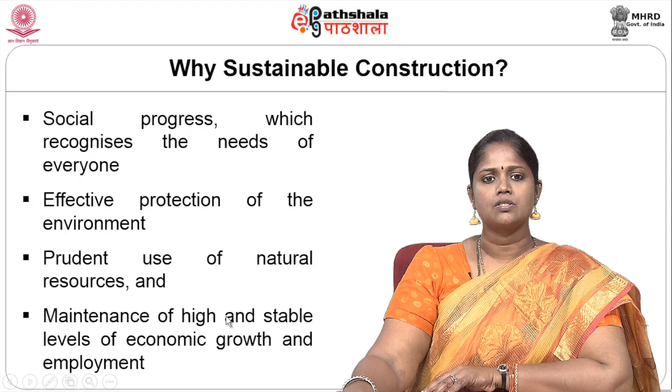In sustainable constructions, the social progress recognizes the needs of everyone. The main objective of sustainability fulfills the needs of the present and also categorizes the needs of the future, fulfilling the needs for everyone in all aspects. That is the main consideration in sustainability. It also protects the environment in a very effective manner and takes care of the natural resources available in the world, the amount of depletion of natural resources, and how to conserve these materials to a great extent. In this way, the maintenance of high and stable levels of economic growth and employment is categorized in sustainable constructions. Sustainability can be defined with many comparisons and statements.

Now let us look at traditional criteria. In traditional criteria, that is nothing but the vernacular materials and construction techniques. In this we can look at cob, wattle and daub, compressed earth blocks - all the vernacular traditional methods implemented in rural areas by rural people will come under traditional criteria.

These materials play a great role for sustainability and also increase the performance. Here, performance is nothing but the thermal performance of the material. All the vernacular materials contribute a greater level of thermal performance by reducing the climatic temperature. That means outside it may be 30 degrees Celsius and inside it will maintain 25 degrees Celsius. A temperature difference of delta T will be 5 degrees Celsius.

In this way, all the traditional materials provide a major role in maintaining thermal comfort in a building and also quality. The cost is also very less since it is available in the same place itself, and it is sustainable as we are reducing resource depletion and protecting the environment. In this way a healthy environment can be provided - we are not using any chemical elements or artificial material treatments, we are using natural materials in a traditional way. So the indoor air quality also increases to a greater extent.

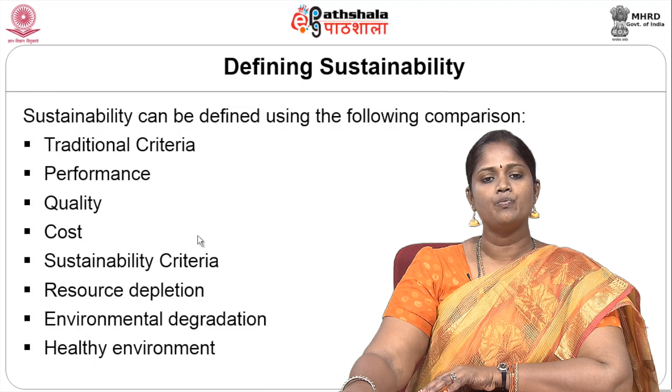And if we reduce our energy use, global warming will also be reduced to a greater extent. This is providing a role toward environmental considerations and resource, waste and recycling. The 3 R's we have seen in sustainability are reduce, reuse and recycle. This is the mantra for providing a sustainable environment and protecting the world from pollution and hazardous substances, as well as protecting the internal environment. We need proper sustainable planning - how to preserve our land, how to conserve our resources, and whatever reclaimed land we have, we need to use it properly.

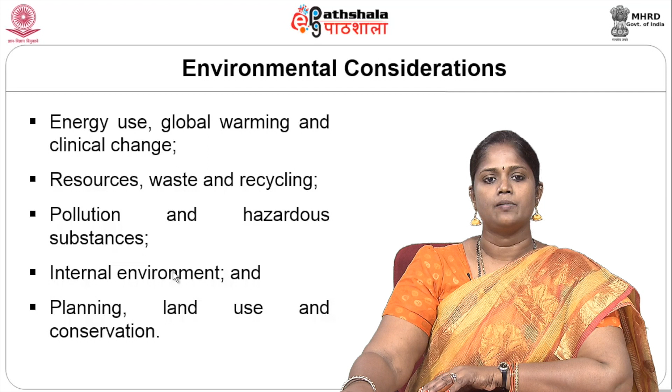Now let us look at life cycle assessment under sustainability. This is very important to know about the every death and birth of the material. It is defined in ISO 14040. It is a technique assessing the environmental aspects and potential impacts associated with the product - compiling an inventory of relevant inputs and outputs of a product system, and evaluating the potential environmental impacts associated with those inputs and outputs.

On the whole, life cycle assessment is - for any material used in the building industry - a set of LCA values that give us a hidden factor of whether this material is rich in sustainability or not, whether it is expensive, accessible, or necessary to use in the building. Interpreting these results in a fruitful analysis, and these impact assessments give us a greater contribution toward a sustainable built environment.

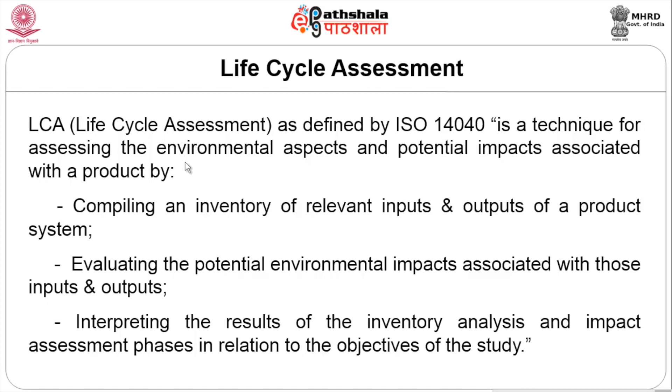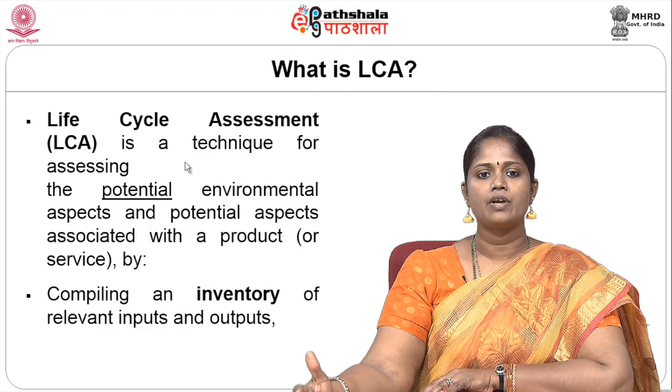Now let us look at the definitions of what they say about LCA. LCA is a technique to assess the potential environmental aspects - that is, to lead to the pathway of sustainability or global sustainability - and potential aspects associated with the product, which is compiling an inventory of relevant inputs and outputs of these materials, and also evaluating the potential environmental impacts.

If we use these materials, what are the harmful environmental impacts we are going to get? Is there any reduction in the IAQ value? Is there any kind of radiation over this material, or any kind of heat energy trapped inside or outside the surface, or inside the surfaces of the roof or wall or any other part of the building? All this interpretation of results impacts various phases in the study, and provides objectives for what needs to be done.

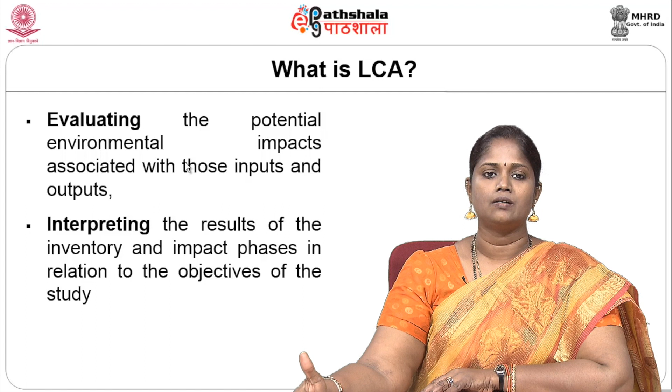Now let us look at the life cycle assessment framework chart.

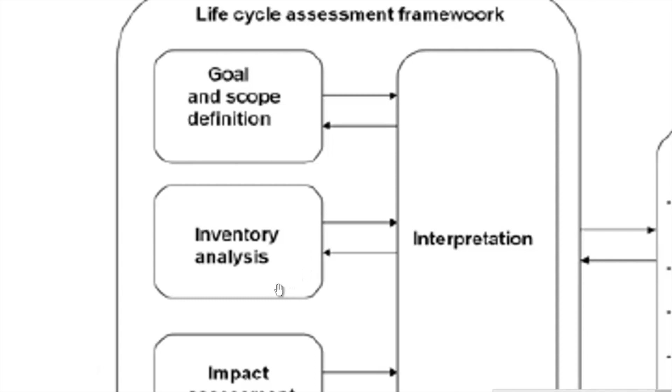The first chart describes the goal and scope definition. The goal and scope definition is to provide an entire clean, global, sustainable built environment. Then comes inventory analysis of whatever materials we are going to use in the built environment, and impact assessment of these materials towards the environment. With these interpretations we implement direct applications in product development and improvement of the built environment.

Strategic planning provides the way, from the initial form development of an architectural design to the end planning of it, and public policy making, including users' behavior policies or various aspects in the built environment, and marketing and other criteria in the life cycle assessment.

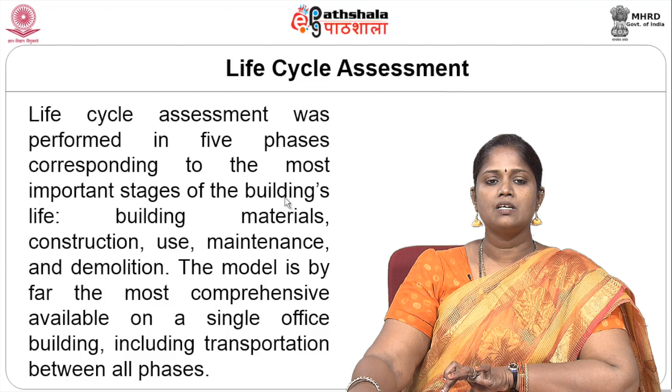Since fuel also comes under material value, we need to look at the LCA value of this material too, in terms of built environment. These phases were analyzed based upon 5 chemical equivalents. We have seen in the last slide the 5 basic phases: materials, construction, uses, maintenance and demolition.

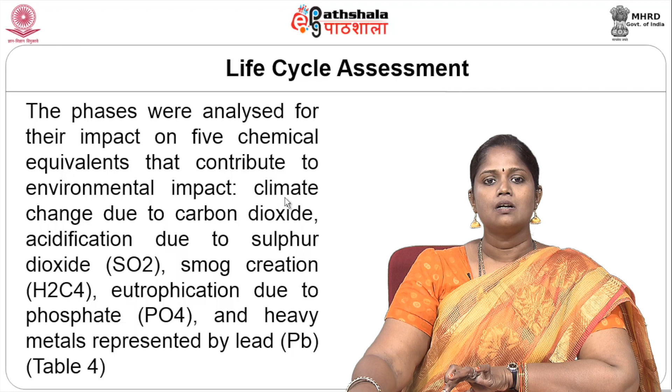Now, 5 chemical equivalents: climatic change due to carbon dioxide, acidification due to sulfur dioxide, smog creation and eutrophication due to phosphate, and heavy metals represented by lead. These chemical equivalents contribute a value in the life cycle assessment.

Now look at the life cycle assessment of the building materials in terms of tons of carbon dioxide. It produced 4,800 tons of carbon dioxide, which will impact the depletion of the ozone layer, and sulfur dioxide at 19,000, and various lead aspects at 7.4, which is very toxic and injurious to health.

During construction, it released 820 tons of carbon dioxide, which is a greater value, and sulfur dioxide at 5,800, which is again another higher value in terms of pollution.

Electrical services, which is again a higher value, contribute carbon dioxide emissions of 25,000, similarly 59,000 in sulfur dioxide. Maintenance is coming under a very lesser value, but during demolition it is 440 tons of carbon dioxide and 4,400 in sulfur dioxide.

Overall, if we construct any building or demolish it, the amount of carbon dioxide depletion comes under a value of about 48,000, which is huge. These impacts are considered over a 50 years of service life. Environmental impacts of office buildings with 50 years of service life: we are seeing carbon dioxide, sulfur dioxide, hydrogen carbonate, phosphate and lead.

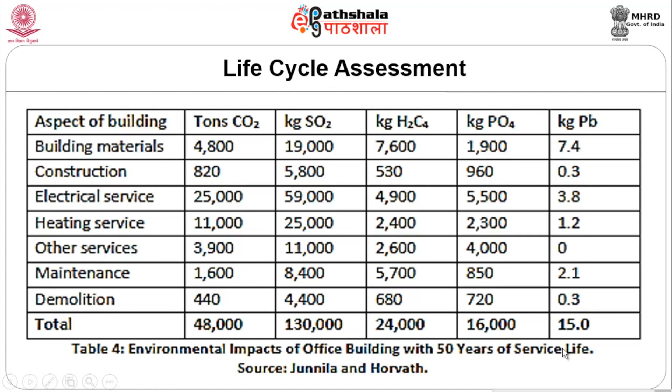So, to protect a healthy environment, what needs to be done? How do we protect ecology or minimize ecological impact? First is minimal waste, to reduce waste and also reduce pollution, and maximum amount of recycling, if we do, we can reduce pollution, and protection and enhancement of the natural environment, wildlife and biodiversity to protect local ecological resources and the environment.

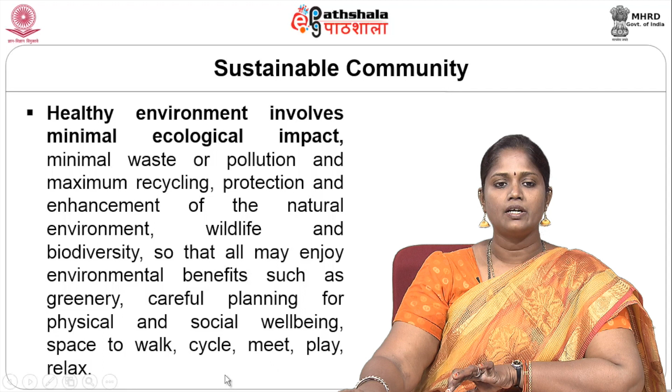Everybody enjoys the benefits of the environment, which is greenery, and we require careful planning for physical and social well-being, like spaces to walk, encourage pedestrianization and reduce vehicular movement. In this way, we reduce toxic gases like carbon dioxide, sulfur dioxide and hydrogen sulfide emissions into the environment, and have social gathering places like playgrounds and environmentally friendly spaces for relaxation. In this way, we can lead to a prosperous community.

Healthy living will lead to a healthy community. So healthy, prosperous economy will also be generated in terms of wealth and long term investment, without destroying the natural and social capitals. So we need not import materials needed for construction from various countries; we can use our own resources, reuse and conserve them, and reduce waste. In this way we protect our economy and minimize resources, achieving good environmental impact, which develops new skills through education and training, and meets basic needs through local jobs and services.

A healthy living will lead to a sustainable community, and also a social well-being arises from a people, which gives the sense of security, the belonging of our own region, our own materials, our own area, our own environment, eco-sensitivity.

These kinds of familiarity will support neighborliness, cohesion and integration of different social groups based on respect for different cultures, traditions and backgrounds. It protects our vernacular culture and also the value of our traditional heritage.

And it requires proper planning. A planning again imports a design. The design needs to take care, initially from the formation to the end product.

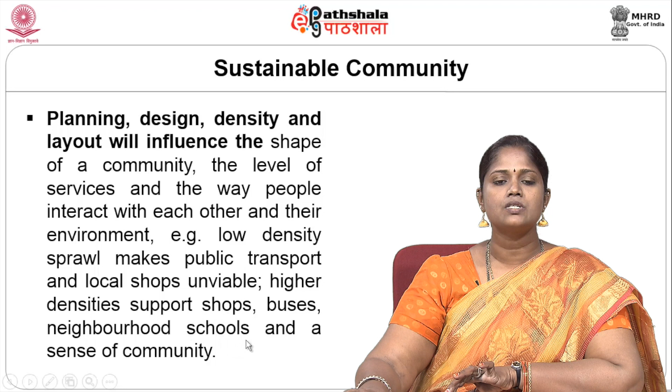Minimizing energy use and environmental impact contributes to sustainability, as we have seen, and also helps in reducing global warming and encouraging the long term stewardship of communities.

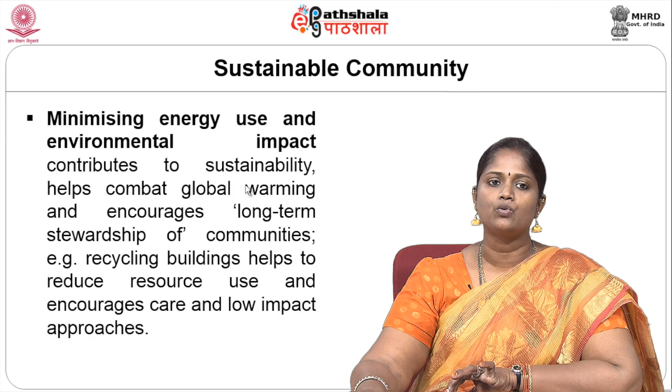Recycling buildings helps to reduce the resources used and encourages care and low impact approaches. We have seen minimizing the energy usage of the materials.

Now look at the viable local economy and services which is provided in the country, which is underpinning for community development and survival. For example, if you look at it, the loss of manufacturing has made many traditional urban communities unviable.

There are no traces of these communities existing in the place; also we can find it in many places. This requires a major economic shift and new uses for existing infrastructures so that they can flourish again.

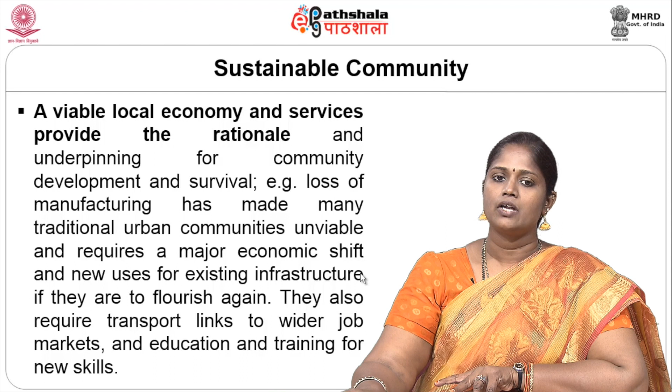They also require some kind of transport which links and connects the wider job markets, which again needs education and training in new skills for the younger generations.

So in this way we can look at it. We need to look at community organization and neighborhood management, which plays a vital role in creating social networks and urban viability, ensured in well maintained and secured conditions for stable and long term participation.

Public participation plays a major role in a sustainable community and also the cohesiveness of the community. If you look at an example like regeneration, the regeneration of old companies and providing job opportunities and local housing.

And neighborhood management organizations, so as to improve the level of social life of the people, and it again transforms the basic infrastructures to improve street conditions, community safety and security and social contact.

And youth engagement, by providing learning services, workshops and training for the youth, by acting as a local conduit for decision making and coordinating supervision and frontline service delivery, which plays a major role in the organization and the neighborhood management in the sustainable community.

What makes a sustainable community? So we have seen various factors. Now, some of the key factors we look at in sustainable communities: a flourishing local economy which provides job and wealth to the people.

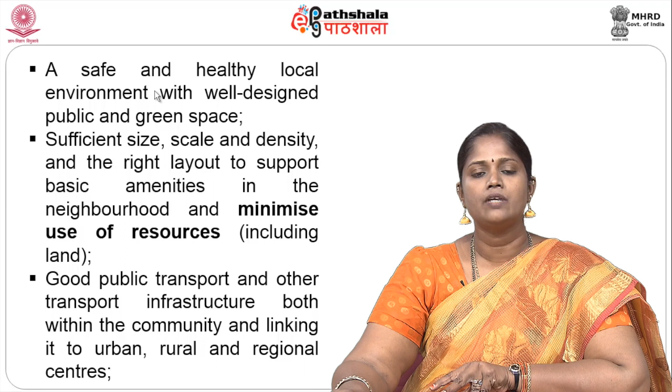Buildings have to interact both individually and collectively with the people, which can meet their needs over time, and also by minimizing the use of resources we can construct the building.

A well integrated mix of decent homes of different types of tenures to support a range of household sizes, ages and income groups like LIG, MIG, HIG. So we need to have a design orientation for different tenures and income groups of people.

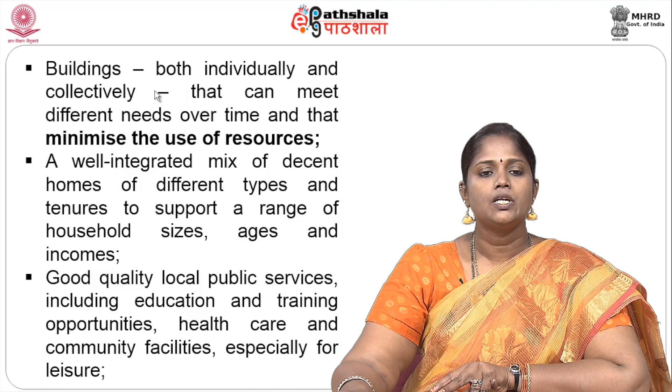A good quality of local public services including education and training opportunities, health care for the people, and community facilities especially for leisure, to encourage social communities and engage old age people and youngsters and kids, providing playgrounds and social interaction places like parks and other areas.

In this way we can provide a diverse, vibrant and creative local culture which gives pride in the community and cohesion with it. It is something like a sense of place, a sense of belonging, which we provide to the people so that they feel they belong to this place, need to protect this place, and need to use the resources in a proper way.

The right links with the wider regional, national and international communities. There are various measures of sustainable communities we have identified.

Among them, 4 main measures of sustainable communities are important: to support planning for sustainable densities, design and layout, which is an architect's job; to minimize the energy usage of the building for good environmental impact; to foster economic prosperity; and to support community organization and create neighborhood management. These are the 4 main measures of sustainable communities identified by the government in sustainable community planning.

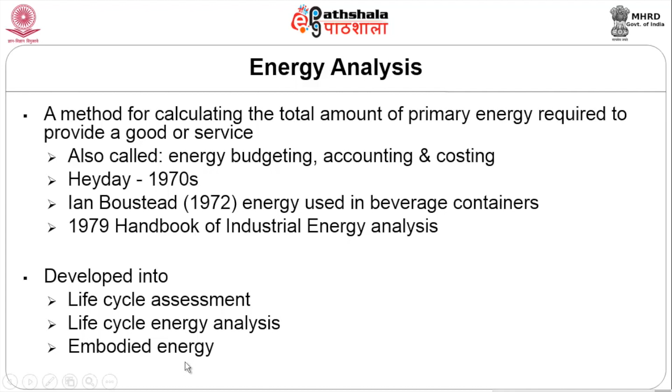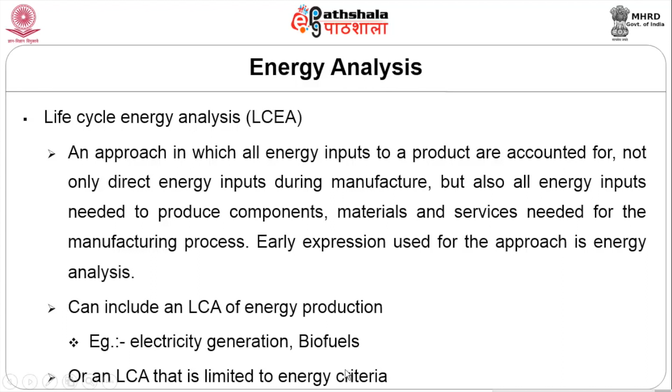Life cycle energy analysis is an approach to integrate all energy inputs into a product, accounting not only for direct energy but also the indirect energy associated with producing the components, materials and services needed for the manufacturing process. An LCA can include electric generation and biofuels, or an LCA can be limited to an energy criteria alone.

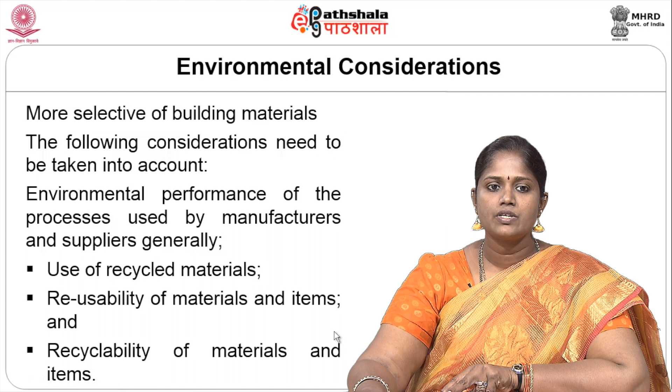For building materials, the following considerations are taken into account: mainly the environmental performance of the process used by the manufacturer in industries and the suppliers when they supply materials to the site. The first considerations are use of recycled materials, reusability of these materials, and recyclability of materials and items.

So waste minimization through reuse and recycling involves various steps. The first is prevention of usage of material not associated with environmental consideration, then reducing the usage of this material, that is minimizing it, then reusing the materials used in construction, recycling these materials, treatment of these materials, and the last stage is disposal.

So if you look at it, the more favorable options are minimization, prevention and reuse, which play a major role in terms of environmental considerations, whereas treatment, disposal, and recycling lead into some amount of energy impact into the LCA.

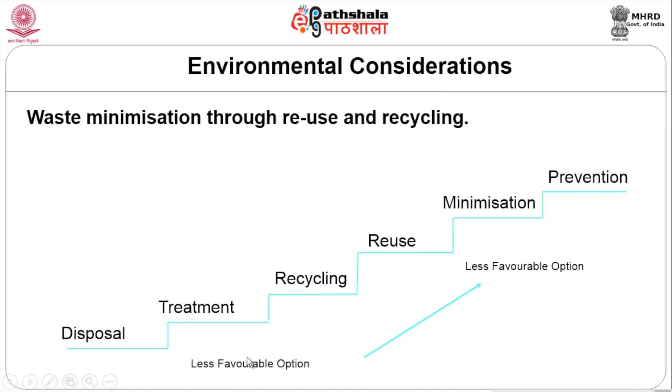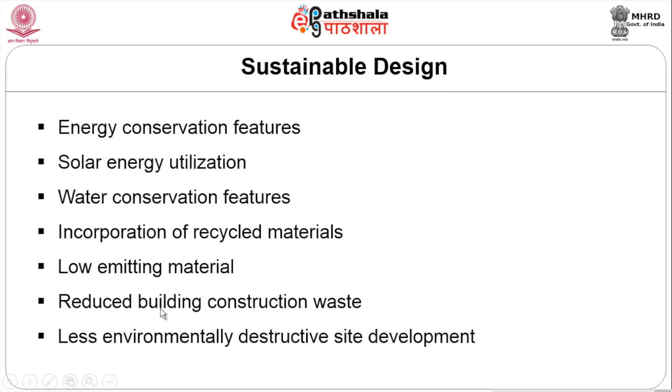So energy conservation features include solar energy utilization, which is again a renewable energy, and also water conservation features like rainwater harvesting systems, and incorporation of recycled materials—the debris of waste materials used in demolitions can be used as recycling material, like filling for the plinth, filling the stands, and also low emitting materials, reducing building construction waste, and less environmentally destructive site development.

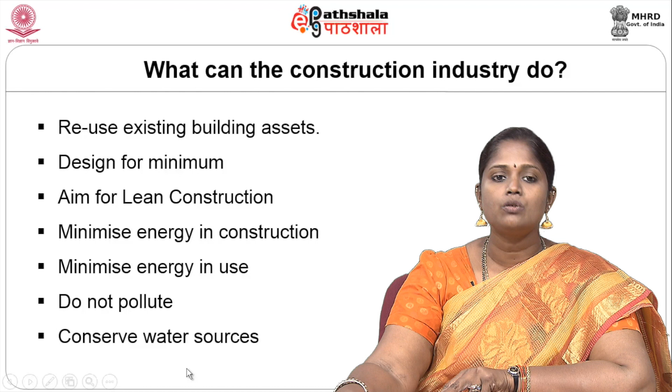So what can the construction industry do for reducing this LCA? It is reusing existing building assets, designing for minimum rather than lavishness, and aiming for lean construction, which is a vertical way of construction. Also minimize energy in terms of construction, minimize land use, minimize energy in use, and not pollute the environment, in order to conserve natural resources and water resources.

Operational carbon dioxide - we have known about these factors, the depletion of these gaseous substances which plays a major role in the depletion of the ozone layer. So how to reduce this carbon dioxide and energy consumption in new building constructions, and also the operation cost.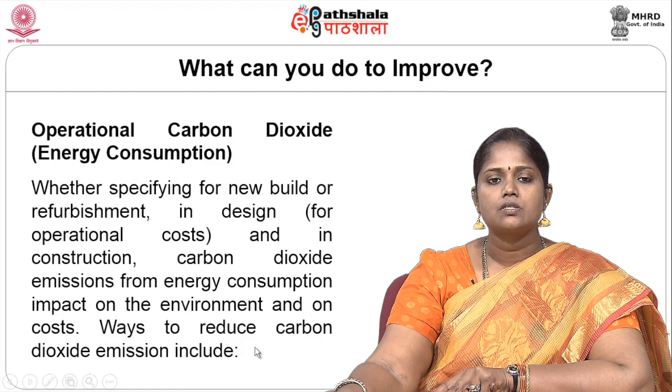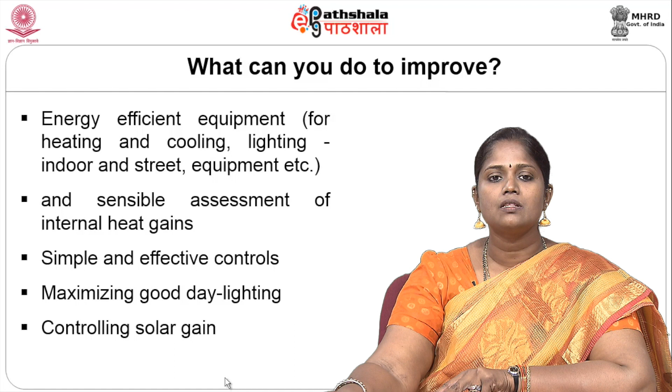Reduce emissions by providing efficient heating, cooling, and lighting systems, HVAC systems, and indoor equipment, along with sensible assessment of internal heat gains. Simplifying the controls and maximizing good daylighting and controlling solar gain is also another factor.

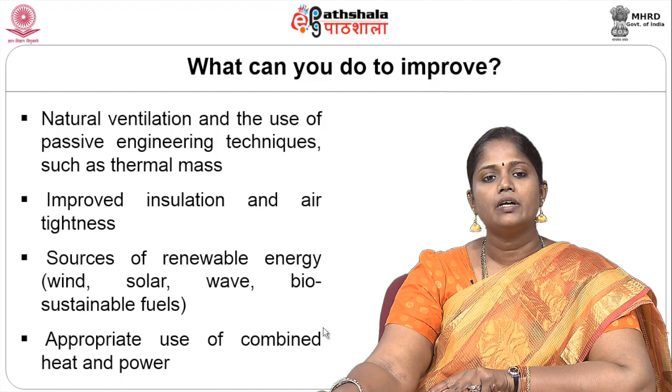Air quality improvement by providing more windows, natural ventilation, and passive techniques also provides improved insulation, various renewable energy resources like wind, solar, biosustainable fuels, and appropriate use of heat and power in the building industries.

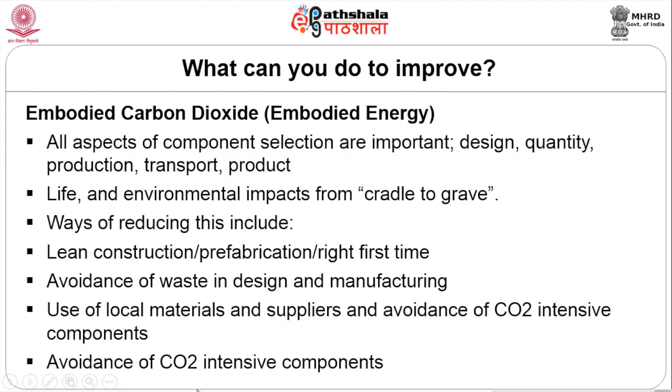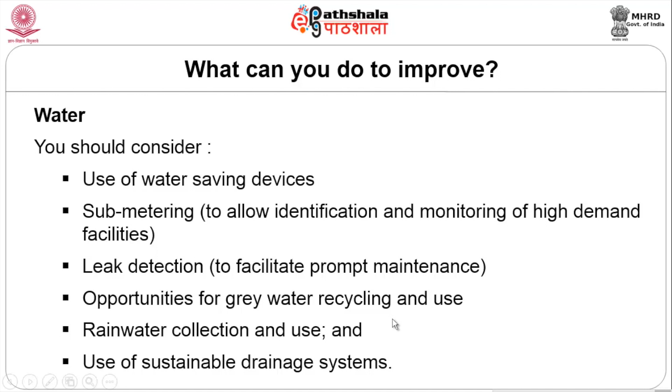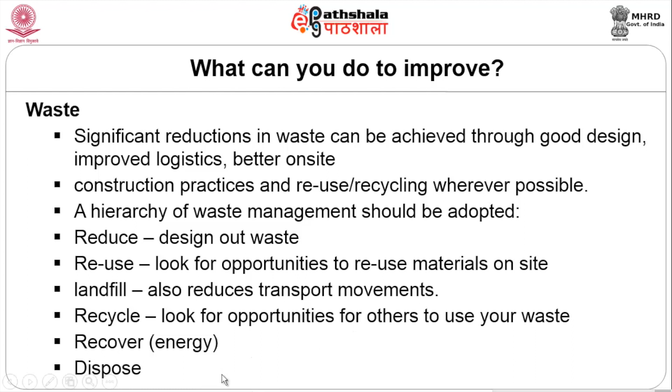Reducing waste, reusing, looking for opportunities to use materials on site, landfilling, encouraging more reused materials instead of landfilling, and recycling and recovering these materials in terms of energy. If not needed, they need to be disposed of in a well-managed manner.

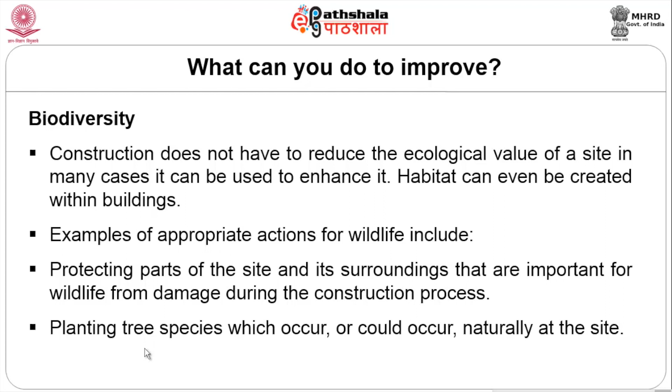What can we do to improve it? Leaving some large grass areas, providing open areas, and minimizing the use of herbicides and use of biodegradable products, so that we are protecting the land from contamination.

Using environmentally friendly ways of controlling unwanted pests, protecting and enhancing existing ecological features like wildlife, trees, hedges, and water courses, and involving local parties in a beneficial manner.

Transportation, of course, plays a major role in sustainability because of fuel consumption. Reducing transport will make a greater impact on the environment, and also in terms of saving the economy, which requires careful planning in a very significant manner.

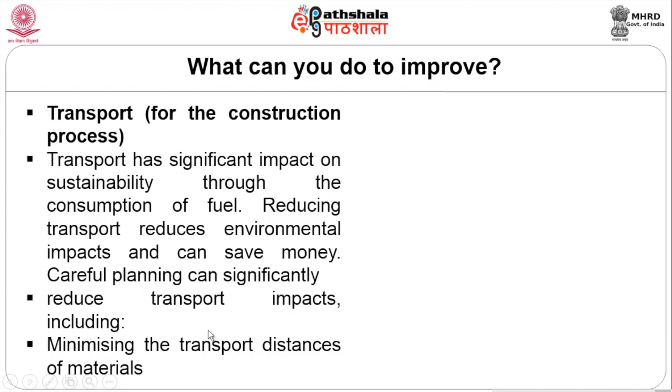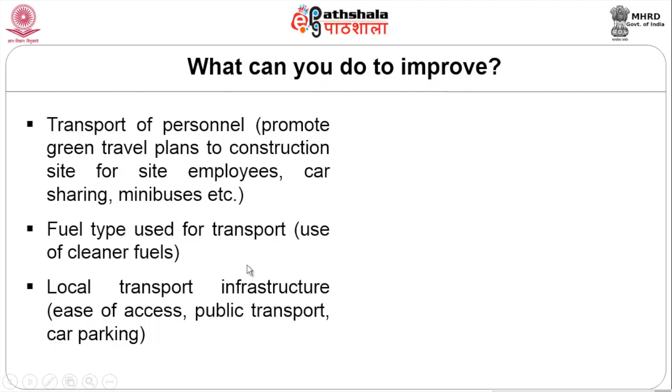Transport of personnel - like green travel plans to the construction site for employees, providing cleaner fuels, and access to public transport.

Whole building strategy - if we look at it, existing R&D programs, building technologies and components tied together by system integration and computerized design tools.

First is passive solar strategy - siting and orientation of the building, the glazing material used, and the shading components used, resulting in a climatically responsive building.

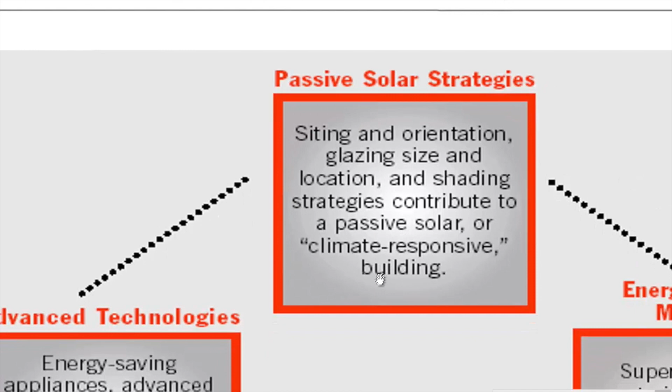Advanced technologies like energy reduction, energy controlling methods and thermostats, identifying proper HVAC systems, and use of renewable energy materials like PV and solar water heating systems.

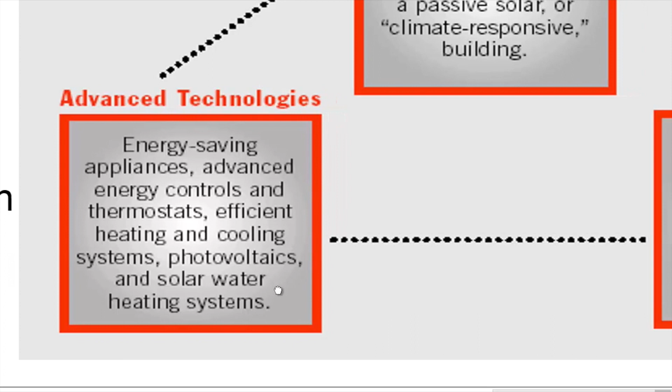Energy efficient materials - superior building materials including high efficiency windows and insulation for brick and concrete, and interior finished products for increasing thermal energy value.

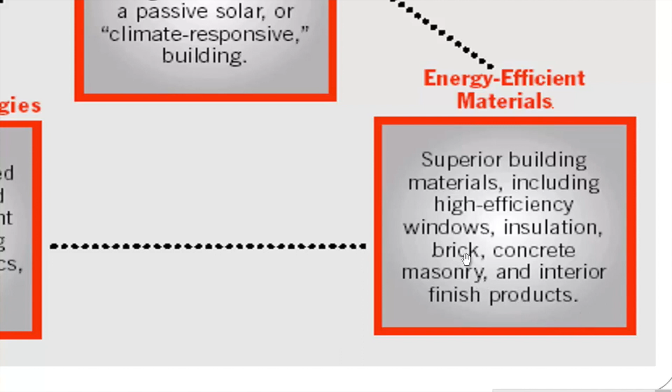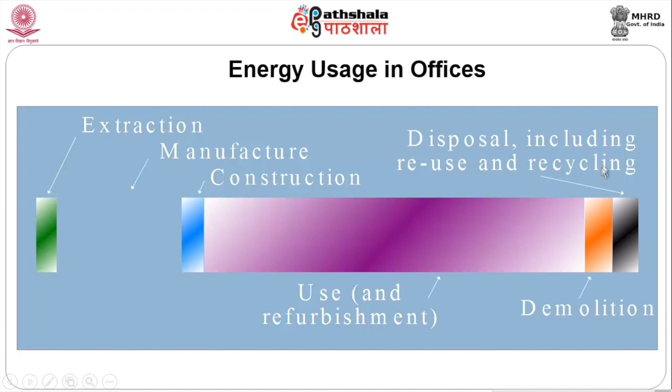Extraction of the material, manufacturing of the material, construction of the material, use of this material, disposal of the material, reuse of this material, recycling of this material, and demolition of this material. All these components together we call LCA energy assessment.

Students should understand the key elements needed for life cycle energy analysis and the summary. Now, the summary of life cycle energy analysis we will look at.

Disposing of these waste materials in a well-treated manner in the building industries. Thank you.